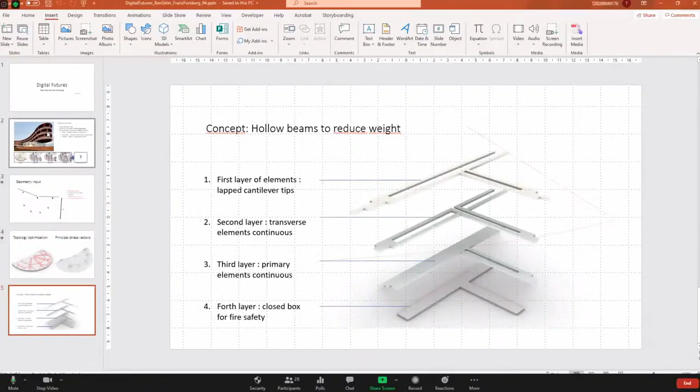Maybe one question I would like to ask, which maybe you mentioned, but I didn't really understand. The building, as you showed it, was always conceived as a steel concrete structure, or was it supposed to be in timber and then was changed? No. So the primary structure is concrete for this project. There's a huge pool, and concrete was a good solution for that area. In this lobe area, we used steel, unlike the normal concrete, because it was governed by self-weight, so we were able to reduce the governing load for this part of the structure.

So this was designed maybe 8 years ago or so. And I think only the first few big CLT buildings in Australia were around that time frame. This is in Melbourne. I see. So potentially it could have been considered in timber, but composite steel and RC slab is also a very efficient structure for something like this. So it was a reasonable design solution, but there's potential for timber to be a competitive solution for this particular instance. And that's what we want to pursue in this project.

Yeah, I'm really fond of that. I think that's really adding a lot to the more explorative projects, with this hopefully being a very technical and solution-oriented project, where by having the structure really be informed by those different flows as you showed it, we'll maybe not only see that this structure can be very efficient in timber, but that it can also offer a certain visual characteristic that is more able to communicate what is actually going on within this structural situation. So yeah, I think that's a really cool approach.

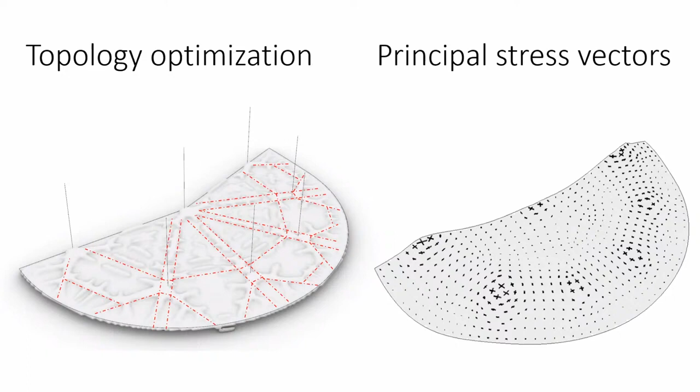But in my mind, as an architect, what we want is also some creativity that we can input into our design, so we won't be limited by the structural simulation software. So I would encourage all of you to reinterpret the pattern you get from the optimization yourself. In this way you can put your own thinking in the reinterpretation process, and this is also a process to design the pattern, not just get the pattern from the optimization.

I understand that this process won't be automatic; you need to draw your pattern yourself from the diagram you get from the structural simulation. But I think that's a better way to put your design thinking in this process. Yeah. And I wouldn't sell yourself short. Many architects have excellent structural intuition.

Okay, so that's what we had for our group. So maybe we can go to the next group unless there are other questions. Yep.

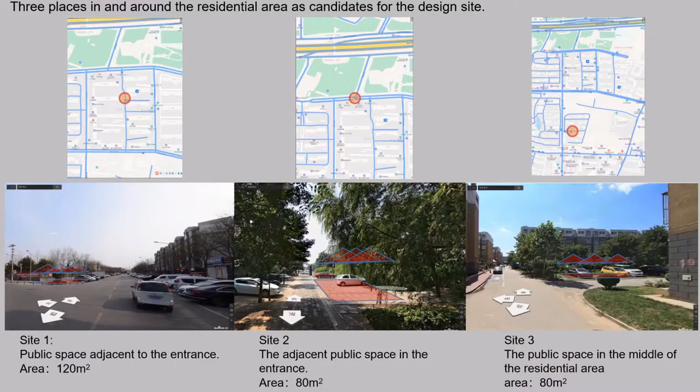Then we selected 3 places as candidates for the design site. They are in and around the residential area. Site area is one of our parameters. Finally, we assumed parameters based on the site of public space.

Let's take a look. Based on observations, if 60 people pass every hour, and the screening process takes 10 minutes, 10 people are tested every 10 minutes. Then if there are 5 groups of medical staff and equipment, 5 people in the waiting area in 10 minutes. In addition, we assume that no more than 5 patients will be in the treatment area.

If the number exceeds this, patients will be transferred to the nearest hospital. Another important point is that the distance between people should be kept at 1 meter throughout the process. In summary, according to the test process, we can draw 3 partitions of our pavilion: waiting area, testing area, and isolation area. According to the area of the site and the testing time, the number of people in each zone is limited, and the area of the zone can be calculated.

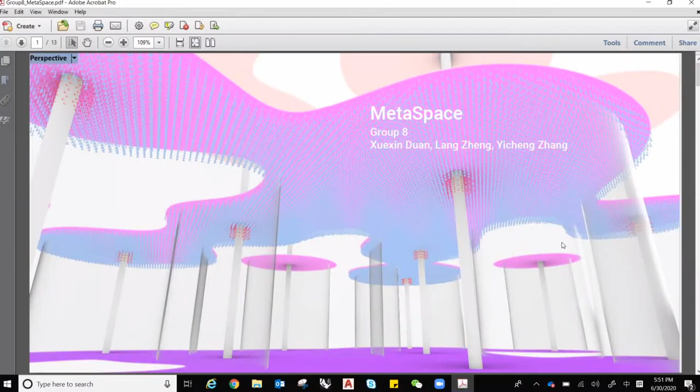So our hypothesis or concept is trying to create a system. We call it metaspace. With a very simple grid and a simple setup, we can generate a flexible space. This system also allows the users to define the space themselves, like the size of the space, the organization of the space, etc. It could be a small pavilion, a villa, or a bigger scale, like a temporary exhibition place. It could also be considered as a metaspace app, so the users can adjust the parameters and even choose the patterns on the ceiling.

It will automatically calculate the amount of materials, the costs, as well as maybe the construction time. And after the user places an order, the robots will come to help build the construction. Regarding the prototype, this is just to show one possibility. This is a 2-floor pavilion. Why did we choose 2 floors? One is we want to show the scenario that this can be multiple layers, as well as to show that by placing a simple grid, we can also generate a dynamic, flexible, and interesting place.

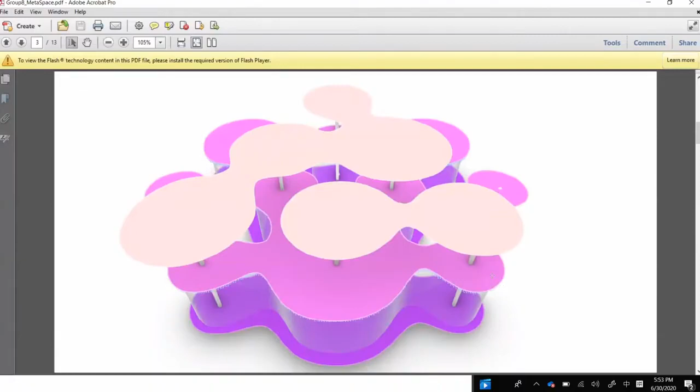Level 1 is more interior space with a courtyard. And level 2 is like an open space with a roof terrace. Also, we can insert the spiral staircase. For the F1 ceiling, maybe it's not very clear, we try to choose a more symmetrical shape. And for F2, we choose a free form, like an asymmetrical shape, to show we can have different conditions.

Okay. Yeah, you were muted for a second. Yeah. We heard you until different conditions.

At different conditions. And we also tested the structure simulations, this is with tOpos. It's quite heavy on computing. And then also with the ISO curves, we think both could work. Maybe the ISO curve is more integrated with the overall language, but I think both look okay. Yeah, so that's it. I think we also have some questions.

For example, for this ISO curve generation, is it also possible to optimize from the structural point of view? And we would also like to know how to calculate the quantity of the materials, and is there any way we can estimate the construction time by the robots, in an ideal situation?

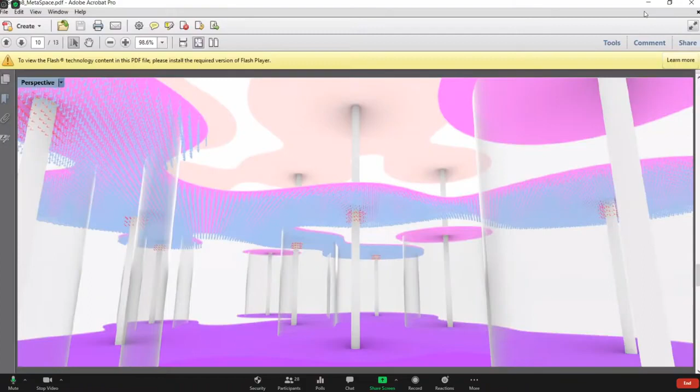Thank you. Okay, so we'll keep on. Mm. Yeah. Yeah, understand. Yeah, we can use the same algorithm to generate the pattern, the same language. Mm.

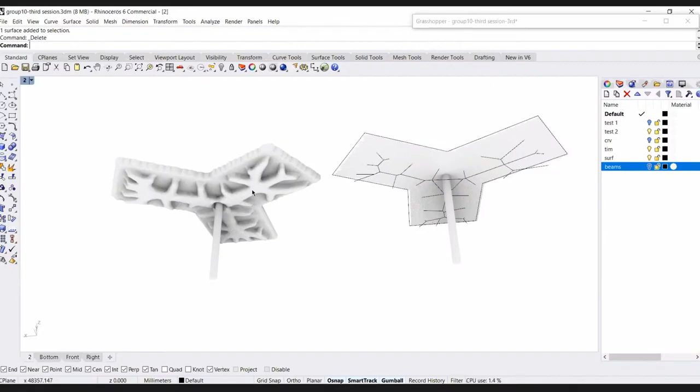Well, we just tried some topology optimization, and for the first step, we used a simple surface with one column. In this case, we just didn't want any collision to occur while assembling the beams on site, but because I wasn't sure if one column can bear the whole loads of the slab and the beams, I tried to add some more columns for the first surface, and I added 2 more columns in different positions, but this time I didn't go through the analysis with this.

I thought it would be more interesting if I use this surface as a module and develop it around a circle in order to have a more directional slab with more columns. I think it's more feasible in terms of structure, and also the shape of it is more dynamic, and also people can use the central space in their quality time maybe. Finally I obtained this shape.

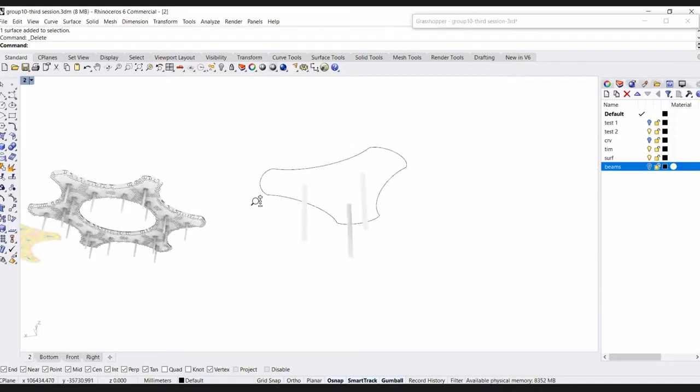And in order to develop my work, I just wanted to use the curves that I obtained from the topology optimization as some guides. Sorry, let me just show it from the pictures here. I used curves as some directions for the final timber beams. So I offset the curves and used these offsets for the final beams. But I have some problems here.

I have a question. As you might see here, there are some gaps between these beams, and I'm not sure if it's logical in terms of structural stability. When we want to assemble the final structure, is it logical to have some separate individual sections, or do we have to design a set of beams that are connected and joined together all around the surface?

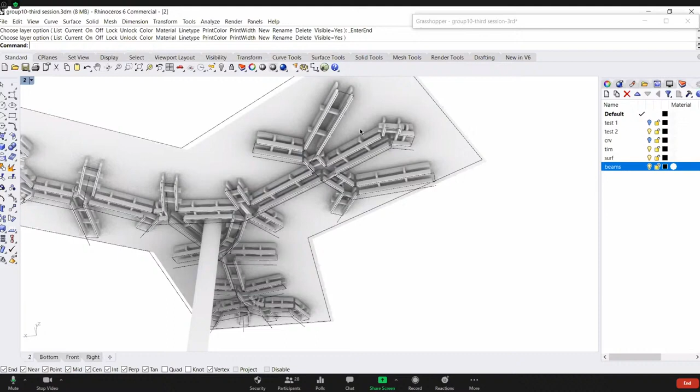Okay. So about the beams, I think that's exactly what we're gonna focus on in the tutorials following right now. For the different spatial configurations, I'm really fond of what we can see right now on the screen. I think that's a nice combination of simplicity while showcasing a couple of situations that are multi-directional. You have the radial situation, where around the ring you would just have a ring of beams.

But then really the question would be how do you integrate these cantilevers into the overall system? So if you're okay with it, just go forward with this. And after today, you're also gonna have a bit more information about how we can explore the beam tectonics.

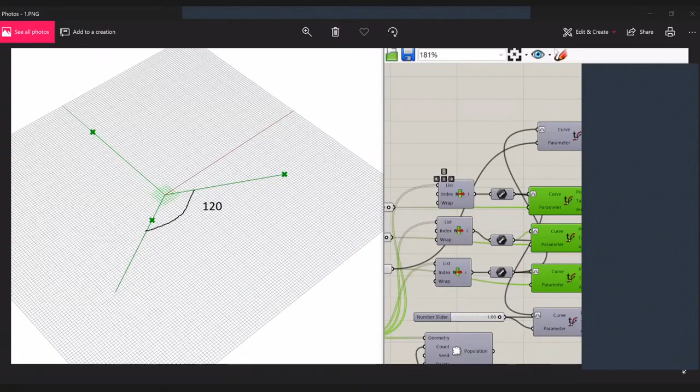Yeah, I see it. Okay, I can start the line with 120 degrees between them because they are at the most stable position to each other. And I try to choose random points on these lines. And after that, I tried to make my model with metaball components, but still I wanted to have more control on my form. So I tried another way.

I made a circle, considering those random points as a plane for this circle, and again chose random points on my circle. And so by interpolating these points, we could have our free forms. And I could make various forms with direct control on them by changing my number sliders.

And I try to consider it at 2 levels to make it attractive, but at the same time I try to have a minimum overlapping of them to optimize usage of material. So I try to make these shapes.

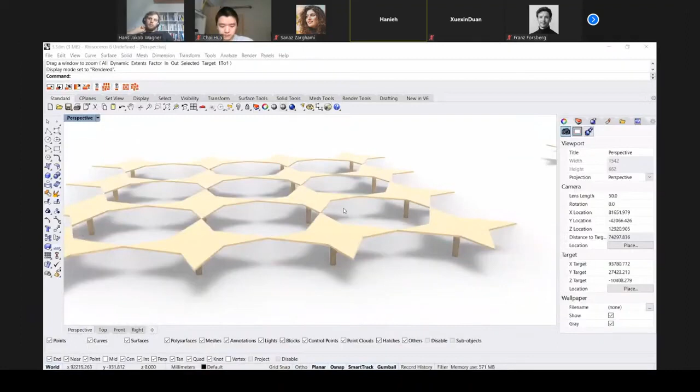Yeah. Okay. As you see in this model, we can produce a lot of patterns here with different kinds of shapes, and these places are empty places, and here we have another kind of places, and we can repeat this kind of pattern to have some great shelters, maybe some shading device.

And this is just an idea which we had, which we worked on last night with our friends, and I just prefer to show you and to know your ideas about them. Thank you.

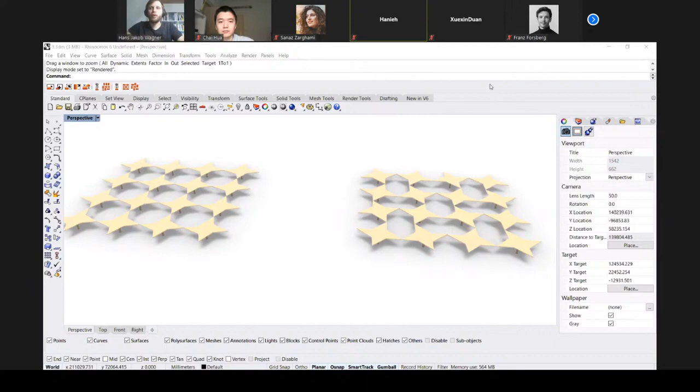Okay. Very interesting studies. Always quite exciting to see the approaches from all over the world to different patterning and these kinds of explorations.

I think what will be most important for you guys as a group is to start working together and to develop, I guess, one main concept forward, right? As you just formed the group half a day ago, I think it's totally fine for now, but maybe starting from tomorrow you should consider having one presentation that shows your project as a group, right?

Okay, with that, if Hua doesn't have any other comments, then we could go on with the tutorial for the beam tectonics. So yeah, let's move on to the next part. Okay. Yep. Thanks, Sanaz, Hanieh, and Xuexin.

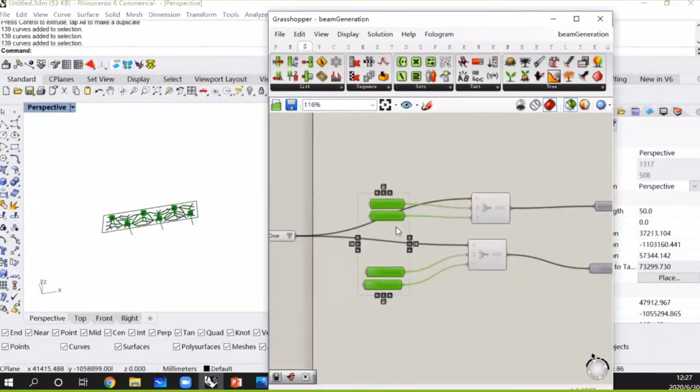So if you go to the Google Drive folder, you can find a shared folder for day 4. It's day 4, right? And there's a GH file there called beam generation, and you can download it and open it. We can take a look at the files together. It's just a GH file without the lines in the Rhino model, they are all internalized here, and I just pick them so that you can see all the lines here.

So while you are downloading or trying to open the files, I will give a brief introduction of the program, so you can see what we're gonna do today. What we want to do is to try to use the network we generated yesterday and transform it to a beam tectonic system that could be used for the real construction. And there are several steps from the initial input lines to the final structure. I think we can separate the process into 3 parts.

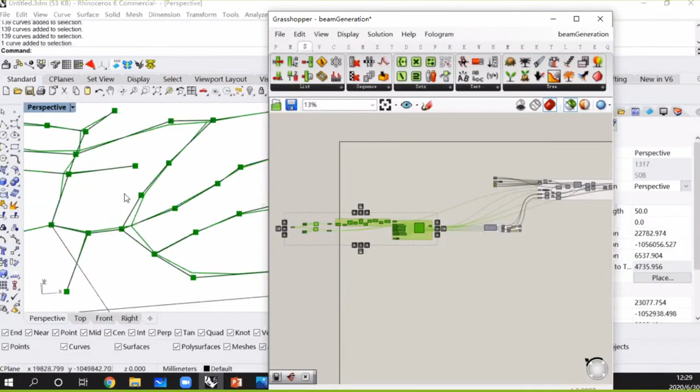The first part is to optimize the input curves, so we can use the optimized curve to generate our beam tectonics. And the second part is just to use the curve we get from the first part and generate the beam layout based on the curves. But in this case, you can see that what we get is 2 layers of

you can see the white line and the black line. There are 2 layers of beam layout, and they overlap with each other, and that's what we get from the second part.

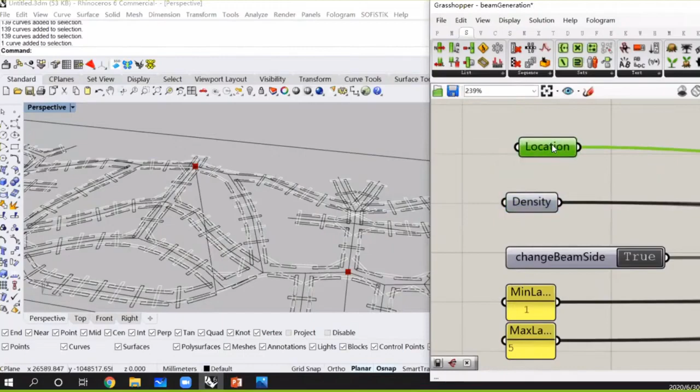And for the third part, we take the results from the topology optimization yesterday. We get the location of all the points in the optimization and the density values, and try to optimize the height of the beams and generate the beams. You can preview, yeah. So you can see the height of the beam is changing at the different locations, according to the structural result. If you're ready, let's get started from the first part.

So to generate the beams, we have the input curves, but the input curves may not fit the element size that we want to use. If you still remember the platform we are using, we use a standard element, grip it through the glue station, put it in position and nail them. So we want all the curves to be well fit by the standard element. But at the same time, we don't want any collisions between the elements, and we want two layers of elements with a certain area of overlap, so we can put nails in the overlapped area and glue on the interface to connect them properly.

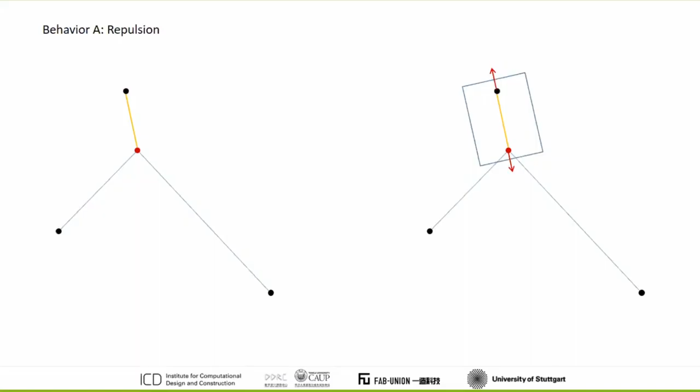So what we are using to optimize the input curves into curves we can use to generate the beams is the program in the first part. I think we call it an agent-based modeling system, and that means in this program we view every intersection point in the input curve as an agent, and we try to move the point locations so that the distance between the agents, or the length of the segments, is kept at a certain value.

So to optimize that, we may have several different scenarios to consider. First, we may have some segment that is too small to fit an element. So in this case, when we try to fit a block like this, and when we want to put another block, can I draw here?

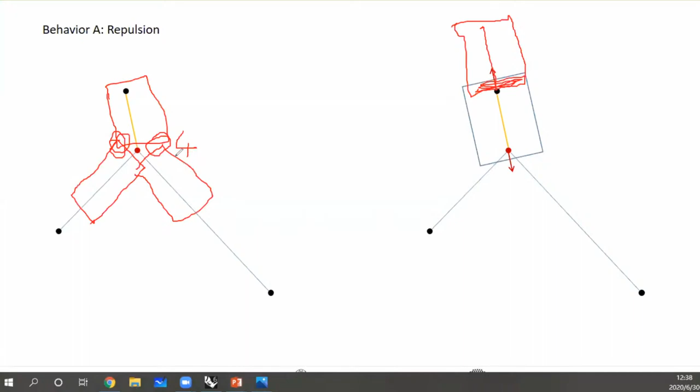So the method we are using is agent-based modeling. For all the agents, we can give them several behaviors to interact with each other. So they could organize themselves with these behaviors to solve some problems that we want.

So the first behavior we want to give to the agents is to deal with the first, very short segment. It's a repulsion. That means when we have very short ones, we define a tolerance: when the distance is smaller than a certain number, we give a vector to each agent, or each point at the end of this curve. So they will try to push each other away. In this way we will have longer curves. So this is for the first situation.

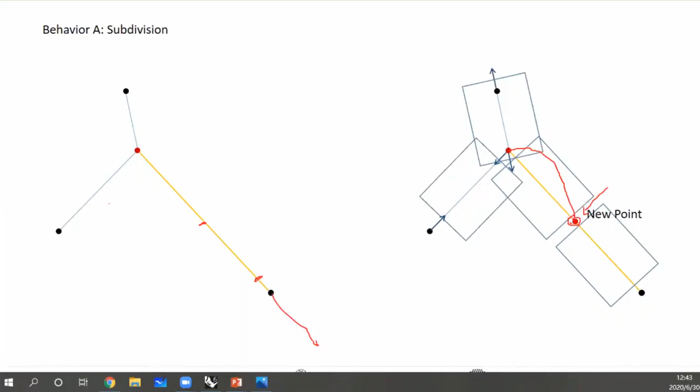Okay. So we have already talked about the 3 situations in the length of the segment, or the distance between the points. The next one is to avoid all the collision points that occurred at the intersections. If you see the blue rectangles, that's where we want to put the elements first, but we will have the yellow points at the collision points.

So in this case, what we can do is push all the points that are connected to this intersection point away from each other. So we will get the blocks also moving away from this intersection point. Maybe if we run several times or optimize very well, we will get the rectangles on the right. So you can see there will be no collision.

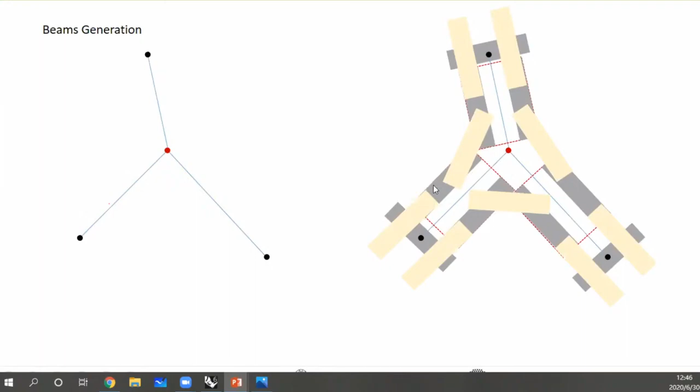The gray blocks here all represent a timber block, a timber element. So we have 2 rows of timber elements, and we will have one in this direction, so they can connect the 2 rows together. But what they connect is the elements on the upper or lower layers. So you can see when we put elements on the upper layers, this block in this direction will try to connect these 2 rows together, and we will have an intersection part here, and we can put our glue and nail them together. So this is pretty much the way we optimize the input curves.

So let's see how it works in the program. In the input part, you will have two options. The first one is all the beams here. The second one is only the three segments here. Maybe you can take a look at the simple one, so we can get a better understanding of how it works. So let's change this one here to 2. So we will make the input the 3 curves here.

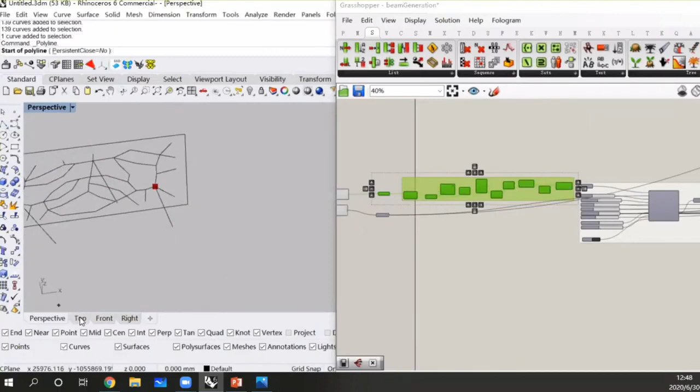So for the program, let's look at all the inputs so we can understand what we need to do the optimization. First, the input lines, which are the lines that we get from the network generation. So we just take this as input, and this is the process that tries to intersect all the segments. That means if you have some grid drawn like this, this part will try to intersect all the curves and get small segments for you. So the input is 3 curves, the output will be small segments like this.

So what the program needs for the input is always small segments that have no overlap with each other, and they will all be split at the intersection points. This part you can read yourself. Okay?

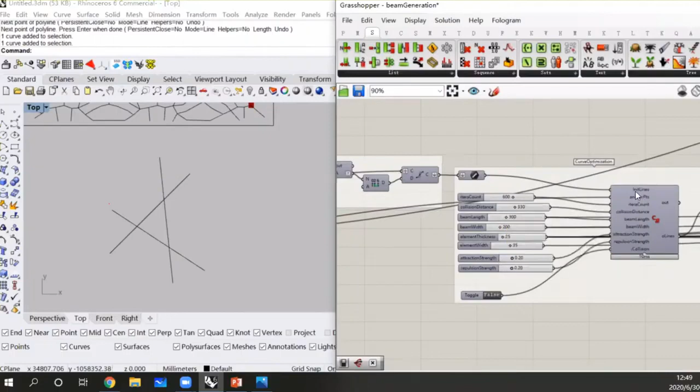And the second input is the anchor point. What the anchor point means is, if you still remember from the last tutorials, we have the points of columns that we kept fixed when we did the dynamic relaxation. So also in this part, when we make the optimization of the beams, we want to make sure that the agent or the point at the top of the column would not move anywhere. We will just set them as anchor points. So this is also from the input.

And the iteration count is how many iterations we want to run this optimization. I don't have to explain that, right? So there are 3 parameters which are directly related to the size of the element we want to use. But there's something I want to make clear, so you won't misunderstand.

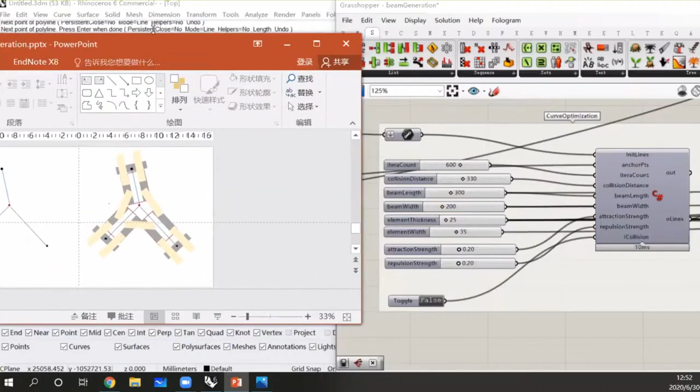So when you see a beam here, the line will represent a beam, and also a block like this will represent a beam. That's what a beam means in this program. So the rectangular block you see here is what we call a beam. So what we input as beam length and beam width: this is the length, the longer direction, and this direction we call the width.

But when you see element thickness or element width, we mean the gray element here. That is a real timber element we use to fabricate the structure. So when we say beam, we mean the abstract rectangle that bounds the elements here. But when we say elements, it's the real elements we use to fabricate. The element thickness and element width are used for the second and third parts. I just put the parameters here, but don't let this confuse you: what we need for the first part is only the length and width of the beam. Okay.

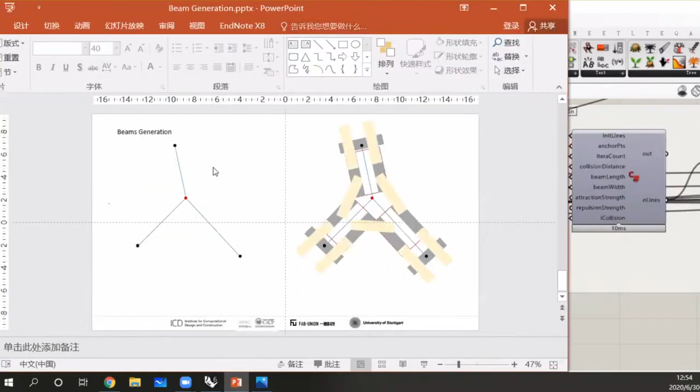Okay. And for the next part, we will have two strengths to input. One is attraction, another is repulsion. These two parameters refer to these two behaviors, how large the repulsion we want, and how large the attraction force we want. But you don't see any strength for the subdivision, because when it reaches the threshold, it will just subdivide. So we don't need parameter inputs for this behavior.

And we also don't have one for the collision, because I set the strength for collision as 1. So the default strength for collision is always 1. That's our most important destination, as we want to avoid all the collisions. That's the most important behavior. So all the strengths of attraction and repulsion are always smaller than 1. We just need to input these two, and you can view them as the proportion of the strength of collision avoidance. Yeah, that was the attraction strength and repulsion strength here.

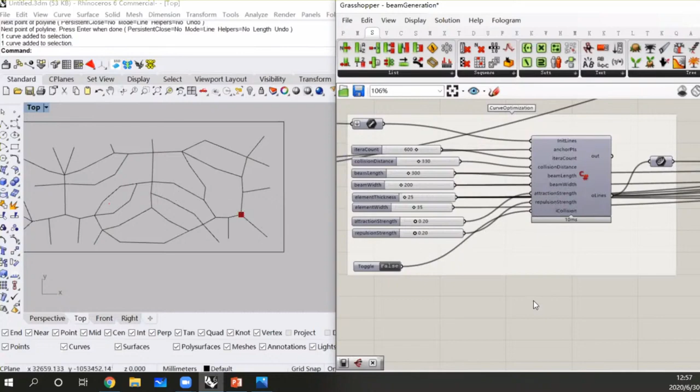When we don't try to avoid the collisions, it could get a pattern that looks quite good, but it's not feasible for fabrication. If we turn this to true to avoid all the collisions, we will have some problem somewhere, and we need to pay a lot of attention to the input curves to avoid all the problems in the collision. You will see later.

So let's see. In this case, we import the 3 segments here, set them as fixed points, run them through this program, and see what we get. Actually, you can see some of the curves have already deviated from the original curve, and the length of the curve has already changed. Maybe if we bake it and check. Yes, we have 2 segments at the longer ones, because this one has already been divided into 2 segments, so we can fit them.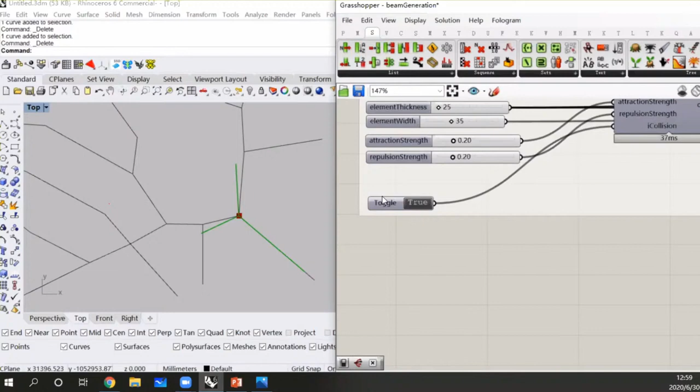And so I hope you can get an understanding of how this program works. Yeah, in this case, maybe there's no collision at all in the first place, so it doesn't matter whether we try to avoid the collision. Let me see how we proceed. Maybe we talk about this part and then we go back to the whole structure.

The second part takes the output from the first program and tries to generate the 2 layers of this kind of beam layout based on the curves we get. Let's get a quick look. It takes the line output from the previous program as input, and it shares the same parameters with the first program. It also uses the beam length and beam width to generate the beams, and it also has element width. I have already explained the width of the gray block and this yellow block.

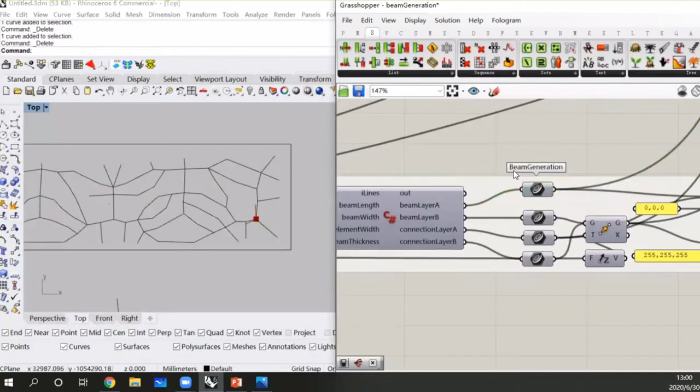And the beam thickness makes a distance between the 2 layers that we generate. The output is this, the first layer of beam layout. You can see we have one here, and we actually have 2 here. If the distance between these 2 elements is enough to fit an element in this direction, it will just generate 1 element here.

And the next layer will just connect the first layer with this same element, and you can see there are no collisions at the intersections, and these beams will connect all the elements in different layers well, and we have proper intersection areas where we could put the glue and the nails.

So this looks fun, and yes, we get just the two patterns on the plan. So this is still not the final beams that we use. So let's see.

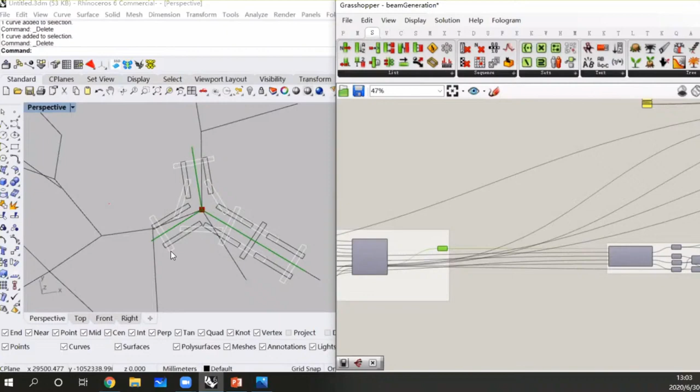So in this part, it still uses agent-based modeling, but the most important thing for this part is to draw the elements. So there's not much to explain in this program. If you already have the curves from the previous optimization process, you can just draw a block, right? And you can draw the block here, and then this is just some geometric drawings. I won't pay much attention to this part.

So actually, if you have the curves there, you can program your own program here to generate different beam layouts. So maybe you can try different layouts that we provide here, or you can invent your own layouts. They're all free in this part. But if you don't want to do that, if you want to use the one that we provide, it's all up to you.

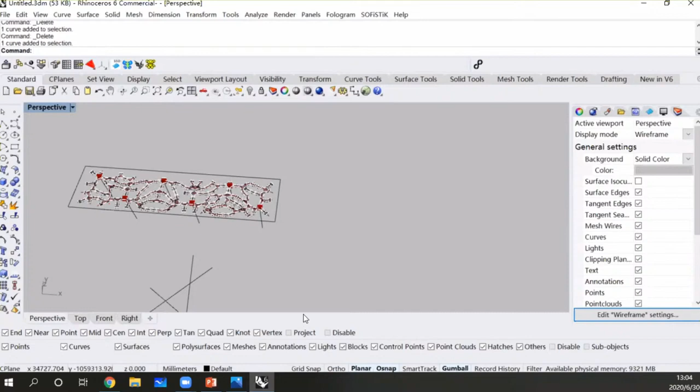And then let's try to see what we can get from the very complex pattern that we got from the optimization yesterday. Let's change this to 1. So we get this pattern as the input, and have like 5 columns as fixed anchor points, optimize the curves. And you can see it will work in a much slower way. So let's take a look at the result.

Now maybe let's keep this true at first place. Now you can see, let's select some area, maybe we keep it here. You can see if we want to generate beams here, this segment is not long enough, so it will be pushed away, and this is also not long enough, so it also will be pushed away. So after all the movements of all the iterations we optimized, the location of the beams may change. It may deviate from the one that we defined at first, but I think they won't move too much.

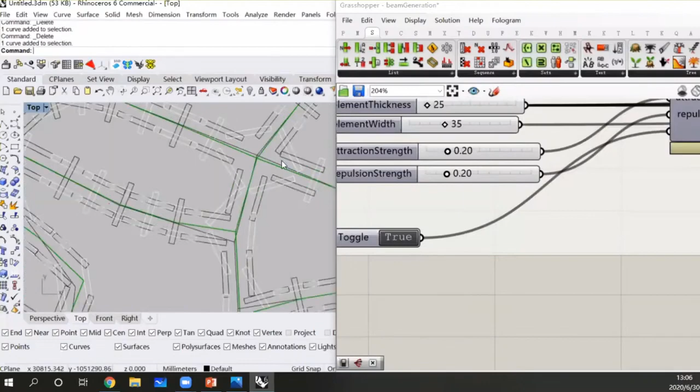And you can see we probably avoid some of the collisions at the joints, but there's still some problems that need to be optimized. But you know, in the computational optimization process, sometimes it just doesn't work out for all the situations. But for most parts, I think it's quite desirable.

Actually this pattern as input has already been optimized manually by me, so you can see there won't be too much problem in these patterns. But if you draw it yourself, with too many small segments or very long segments, the program may generate several situations that we are not satisfied with. We don't want that. Let's just take this as input and see what we can get, and then you may see where the problem is.

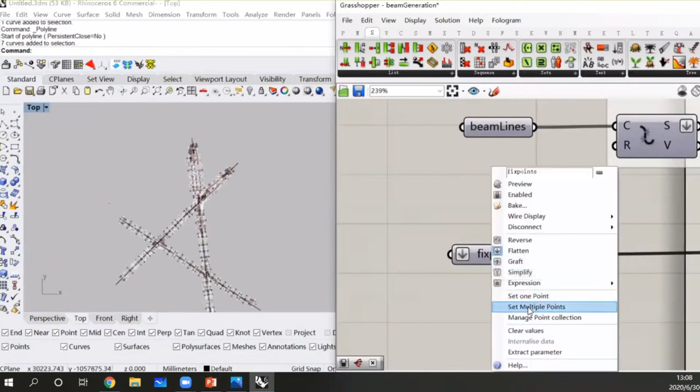And we take these three curves as input. We'll compute, and we take this intersection point as the anchor point. So I think we have some problem here. Oh sorry, I think I culled some curves manually here and I forgot to. One, two, three. Okay.

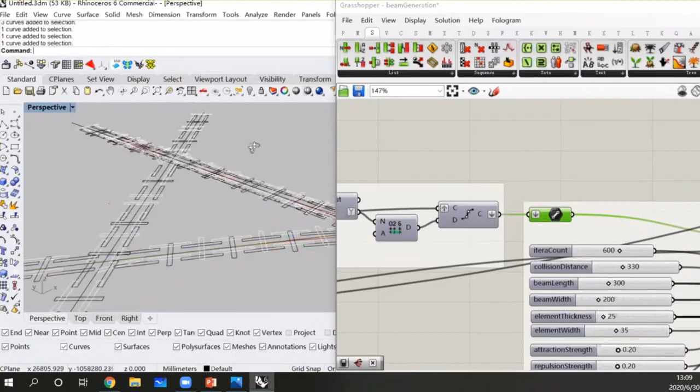So you can see this is totally not what we want. And actually in the optimization, some very weird thing happens. Maybe we try some different patterns. Yeah, this one works pretty cool. And I think it also works on this one. And I don't know what happened in the previous example.

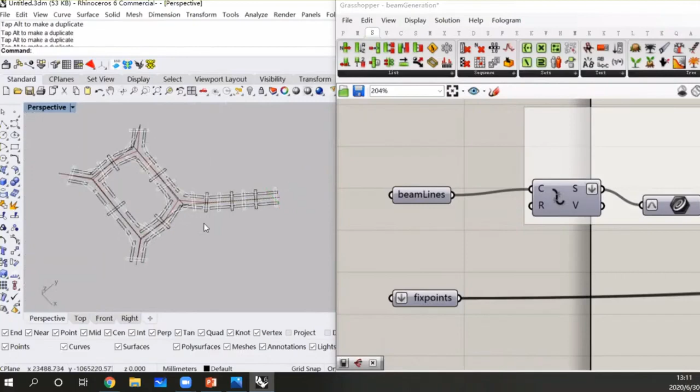But if you have maybe more segments, it works quite good in this case. I'm sure you will have your own problems when you are using this program, but hope it works for you. If it doesn't work in some certain situations, I would recommend you turn this toggle to false, so it won't do the check for the collisions, but it will generate similar patterns that look like this.

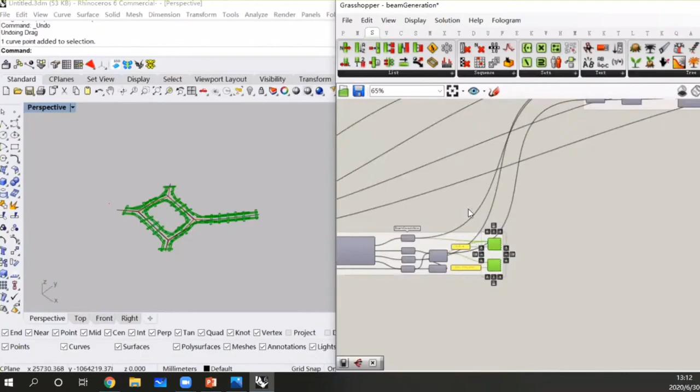And so now we have the patterns and we have the layout of the beams. What we want to do is to generate the beams of the final structure. So to do that, we need to set some anchor points. I see where the problem is.

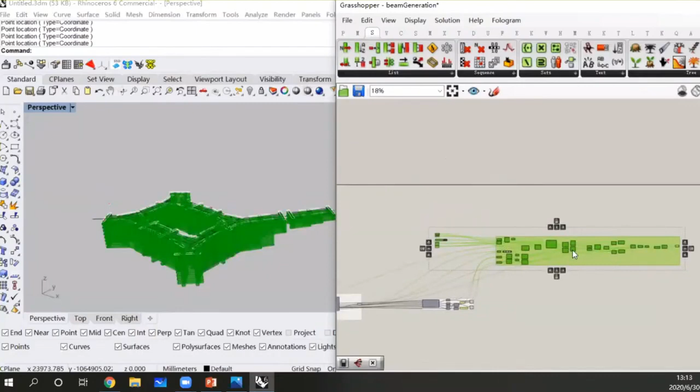So in the third part, as I already said, we take the outputs from the topology optimization. We take the location and the density of the points as the input for the optimization, so that we can optimize the height of the beams according to the structural simulation result. In this case, as this was plotted manually by hand just now, we don't have this to import. So you can see the height of the beams doesn't change too much. So we go back to our example files at the first place.

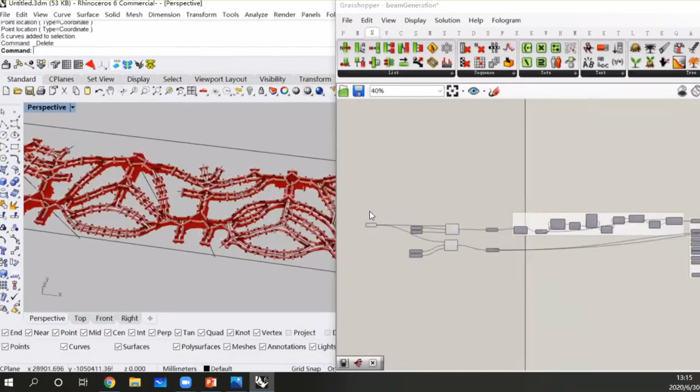It needs some time, and make sure to select the first case. Now we get the pattern here and also the final beams here. And you can see the beam layout and the height.

Yeah, let's keep going. So take the pattern here and the structure property here. What we do is first we get the data for the structural properties, and then we try to change the data into the height of the beams. So what we do is try to remap the data into different numbers of height.

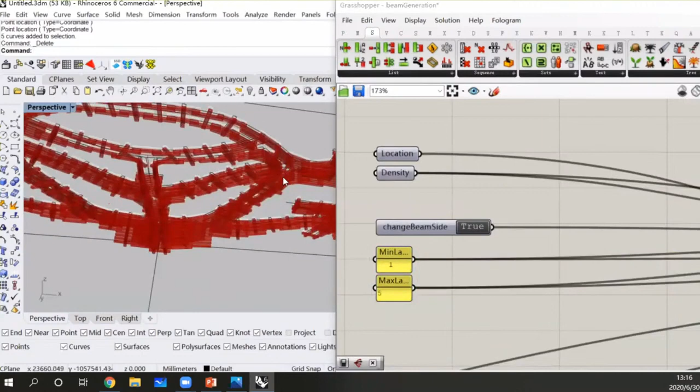So if we have a curve here, and the density of the structure here is very large, in this case maybe we need to remap the height of the beam here to a larger value of the layer of the beams. So here we have two numbers. One is the lower threshold of the height of the beam, so we set it to 1, but you can change the maximum of layers as you want. And here we set it to 5.

And so the density of the structural property will be remapped to some integer from 1 to 5, just 1, 2, 3, 4, 5. That's the only 5 choices we have for the height of the beams. So when we say 1 layer, we mean these two different layers. We call it 1 layer in the optimization process. Okay, so these 2 layers form one layer in this process, but there are 2 different layers in the beam generation part.

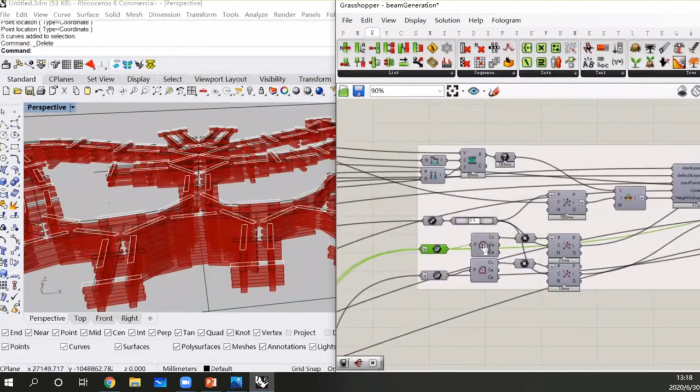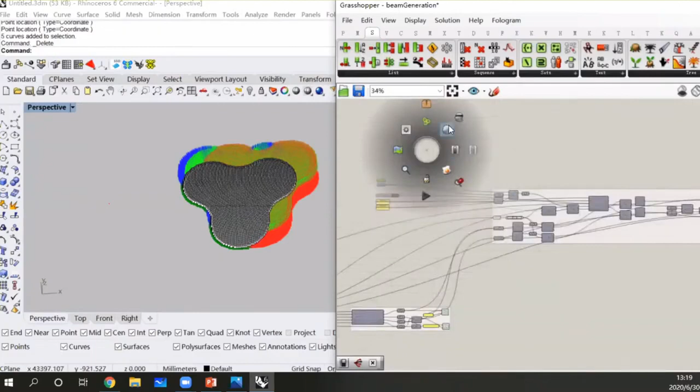Aha, I put the wrong one again. I will update the files later, but let's keep going with the tutorial. I just check the results. It seems fine, so I'll just see.

Yes, and what we want to do is try to find the closest point in the structural simulation, and from that we get the density property of the location. So we remap that density to the integers, and we select the same index of the density and the location. So we will transform the density value to the height of the beams, and try to set it to the beams here.

So for the elements, each element will try to find the closest point in this set. So you will know which curve this element is closest to, so that it will also get the same value from the curve for the height of the beam. So if we set the height of this curve as 2, the closest elements here will also get the value 2 for the height. And then we will just move them into different layers and extrude them. That's what we do here in this part.

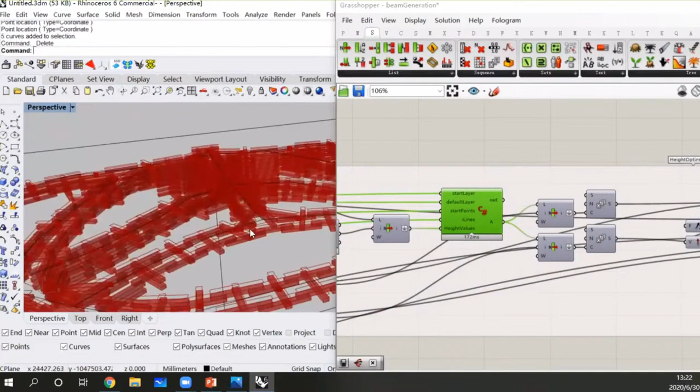I think you can read it yourself. But we have another C# program in between. And that's why now you can see there are several different layers of the beam, even though we have the wrong input of the structure property. What we do in this one is try to keep the change of the height of all the elements very slow.

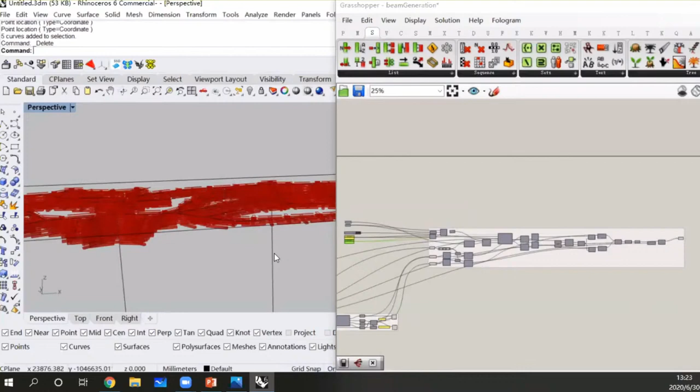And in this program, I set the height at the anchor points to maximum. So if you have a column, you will have 5 layers at the column, and then it will try to decrease the height according to the structural property, keeping it continuous, so there won't be any change that is very steep.

And I think I will update this part so you can get a better understanding of what we do here. Maybe I can answer your questions now, and then after that I will update the files and you can have a look at this yourself. Is that okay? Yes.

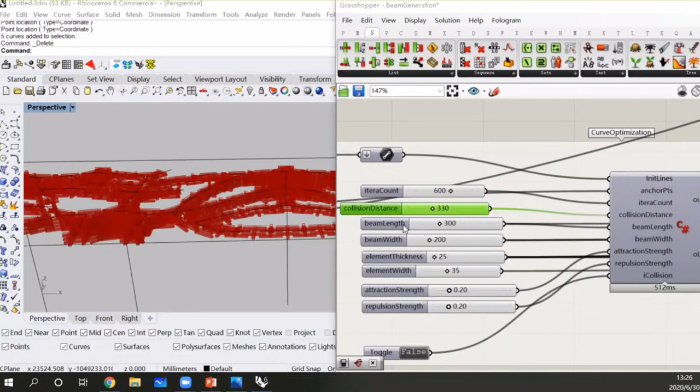I think the collision distance, the distance between the points, needs to be based on the element, the size of elements you want to use, and you set this collision distance. Make sure that the different layers have a certain contact area. What about beam length? Beam length equals element length. Yes, beam length is the same as the element length.

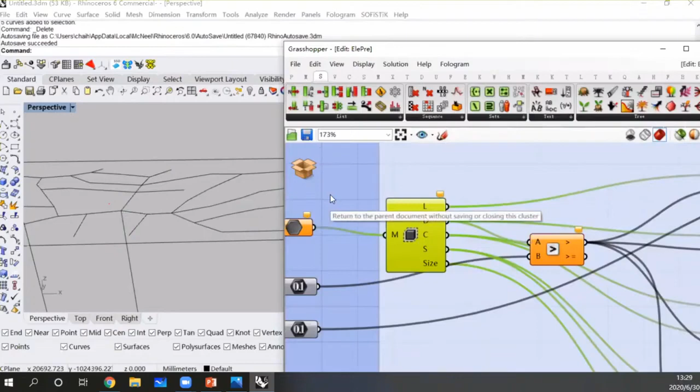Sorry, I don't understand the location component. It can be an internalized mesh from previous content. Okay, the location, actually, maybe I can open files from yesterday. If you have this, you will have an output as location, and then the second is density. And what we do is take these two as input for our height optimization. Okay. Yeah. It's actually two parameters here: location and density.

How can we change the pattern of the connections? So what do you mean by the pattern of the connection? Yeah. Are you here? I see the question you sent to me. Yeah, it's from Sadra, from the live chat. I don't quite understand what's the pattern of the connection. Maybe the patterns that we showed in the previous slide. Yeah, what you mentioned in the presentation. Here? No, before, I guess. Yeah, this one.

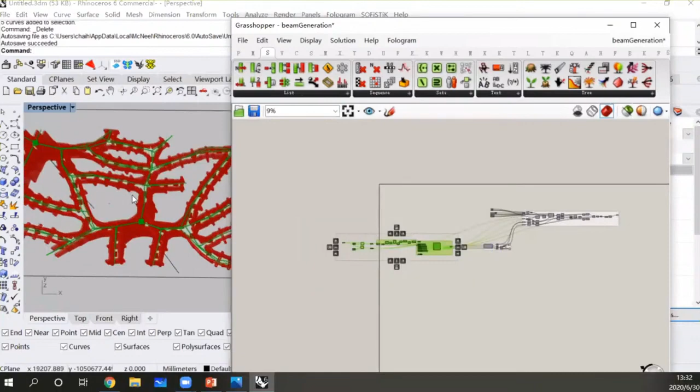Yes. Yeah, I think for the tools we provide, this part only deals with the curves. So if you draw another pattern, you can use this, and this part tries to draw the geometry of the beams. So you can just change this part yourself if you want to define your own. Yeah.

And next: is the collision testing algorithm based on mathematical line intersection or just distance calculation? Actually, it will draw a rectangle in the program. It draws an actual geometric rectangle and tests if there is any intersection between the rectangles. If they collide with each other, then they will be moved away by this part. So it will test if it collides and then move. If there is no collision, this function just won't be activated.

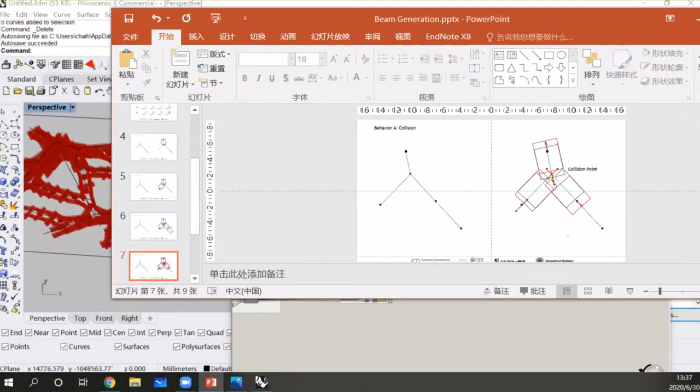Was it Misbah and Mahmoud? Shall we just go back again and present the? I think you already have screenshots in our folder. You want us to send the Grasshopper and Rhino file? Is that easier? Or just screen sharing? Just screen sharing, I guess.

Okay. But was it your group where we said that we would want to double check the topology optimization and see what's wrong? Or see how to make it work? It was not easy actually to play around with the software on my side. Yeah, I think it was really helpful to just have a reflection on that, how it works.

I didn't fully understand. I just remember there was one group where the columns. I think that was Mahmoud and Jennifer probably. Yeah, okay. Jennifer and Alireza, no? Sorry, Alireza and Jennifer. You guys want to check with Hua what might have caused your simulation somehow to ignore the column positions?

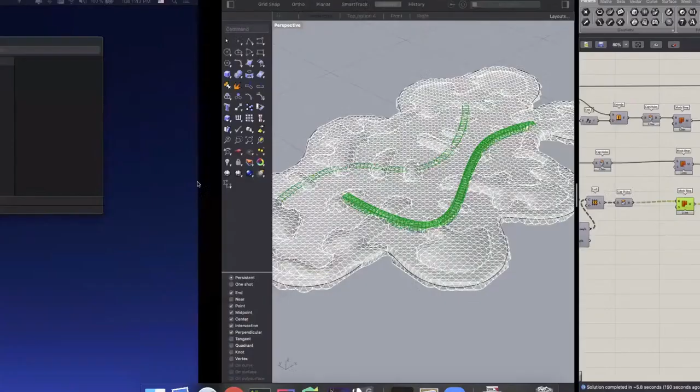Which part do you want to see? Can you explain where the problem is? Okay. Yeah, I'm sure. Okay, yeah, so this is, I mean, very kind of coarse lines. I'm not getting the kind of branching that it's supposed to have. I'm not sure what was wrong exactly.

It's the mesh that you just showed. It's the final mesh you get from the optimization. I'll show you the one. Yeah, this one. Is the one you use to generate the lines. Exactly. But to my view, I think you need to subdivide the structure with more resolution. And maybe run more iterations, you will get a better mesh.

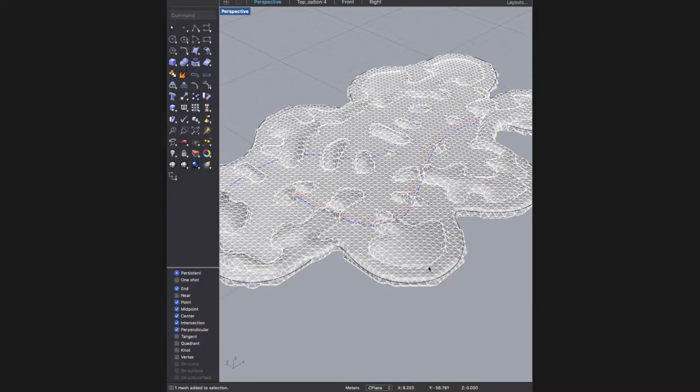So basically, just change the resolution or the size. Okay. The mesh doesn't look like a very desirable result, and I think the cause is maybe the resolution. Yeah, I used only in this case 30 iterations and resolution of 90. I was trying to go as minimum as possible. You can try to increase the resolution. It will be slower, but it may help.

Okay. One more question: if the load or the Young's modulus was... I can't hear you clearly. If the load would affect also the mesh itself or the result, because I was playing around with the load. Sorry, I can't get you. Okay. I just changed the load. Yeah, you can also try to change the load, but I think the resolution will have more effect. Oh, okay, I'll do this. Thanks. I'll just try to play around with the settings.

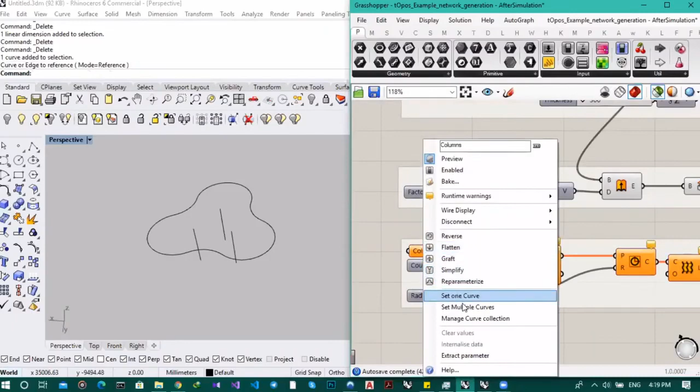Okay, Alireza. You're muted. We can't hear you. But we see your screen. Oh, can you hear me right now?

Yes. I just deleted the values and re-entered the components here, and the result is different from the first result. I am really confused, and I don't know the reason. Shai recommended that it could be because of the units. I changed the unit to millimeters and to meters again, but I really don't know. It may be because of my system or because of not having enough GPU or CUDA.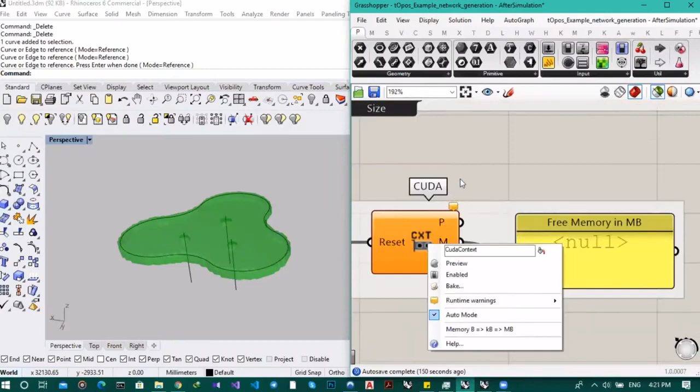I really don't know. But I would be really thankful if you could change this to GPU mode and see, because I cannot change it to GPU mode on my machine. Yes, I cannot.

It is not enabled for me because my graphics card is GTX 610X, and it is not compatible with Topos. Okay. But as you said, and as I read in the texts, it would not have this effect on the results, and yes, I think so. We should get the acceptable result. But I really don't know why we have this weird optimization process.

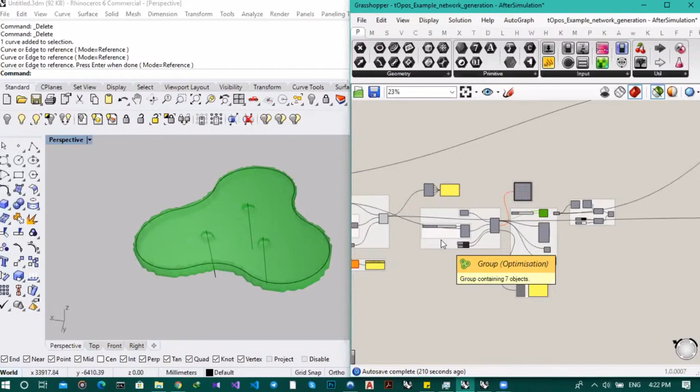But you didn't run the simulation yet, right? What? I didn't understand. But you haven't run the simulation yet. Okay, I want just... It will take some time. Yes, exactly, I'm afraid of that. Maybe don't click. You can change the resolution to a smaller one. Okay. For example, we can turn it into 30, 20. Yes, 30.

And the number of iterations, okay, it is on 40. And try it. If it could be faster, we'd get it soon. I guess it would be. It doesn't work. No. Yeah, just last night I tried to enable it and I was successful, but here... Okay. I guess it is because of my system, with these circumstances and symptoms we have.

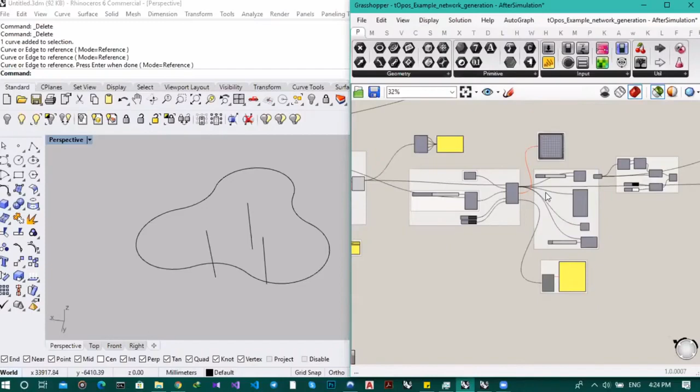Do you get any error before the optimization in the modeling? What? Yeah, no. Sorry. Yeah, maybe I will check your files later. Yeah, actually, that thing happened to me also, and it's just like rebooting things. You basically need to close all the things and reopen them, and just try to set it multiple times. Hopefully, you'll be able to do that. I really don't know where the problem is. I checked all the parameters, but you know it is internalized from the previous file.

But in my files, for example, in this file, we hope. Oh, oh, it works. I think I should restart my laptop right now. Yeah, but quite slow. Should we wait?

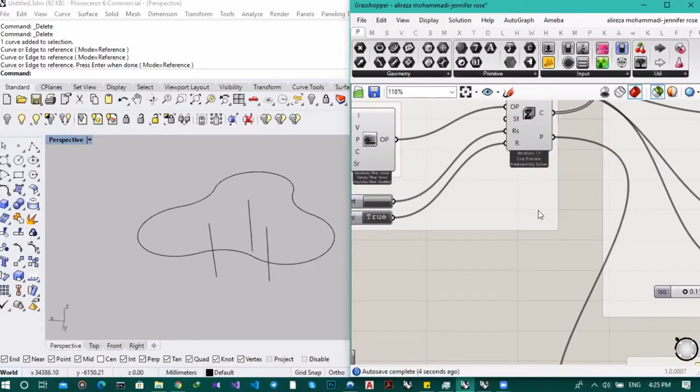I will try to update the files in the Google Drive folder. I have uploaded the updated file, and I don't know if my teammate, dear Jennifer Rose, has enough specifications on his system to get a run. Okay, it's at 15. If some other participants have questions, we can switch and get back to my file later. I am ashamed that the other participants are waiting. Good. And I have already updated the GH file for today's tutorials. You can get it in the same folder.

Just the iteration levels are getting completed. I don't know. Get the results. Oh, my laptop is bursting. And 35. What was the iteration number? It is 48. Whoops. Please, do a little lift. Oh, it is 80. Okay.

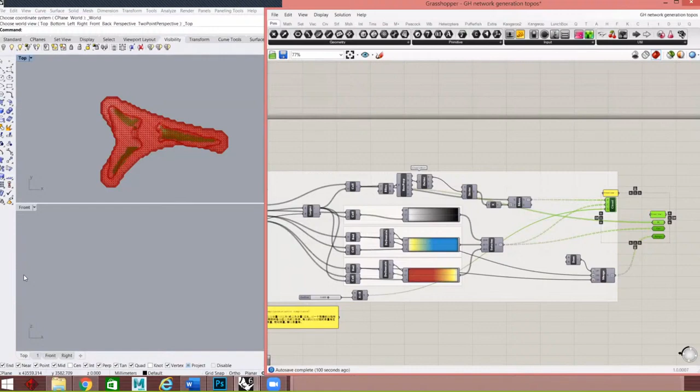If other participants and friends have questions, they can ask until it is completed. I have a problem with the visualization part of the Grasshopper definition since yesterday. Can you help me with that? Maybe I'll share my screen. Yes. I ran the simulation and everything, but when I display it, nothing shows up. So I ran the optimization, and I increased the resolution as well. But then just this bit here doesn't work properly. I don't know what the problem is. So you get nothing here in the preview? No, nothing in the preview. I only get the points selected, but nothing in the blurry cloud. Yes.

Can you turn this to the mode where you internalize these points? And see if there are some numbers inside. Should I just put a panel and check if there are numbers? Yes, can you check what you get? I think it's fine, there are numbers. And I think it's also fine. Good. But why is this? I think everything is okay. Can you turn off all the previews of the other components? Okay.

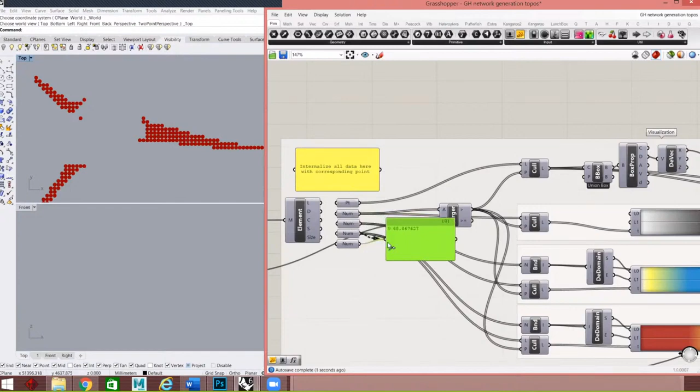When I turn on everything in the visualization, the whole group, then I get a weird generation. It's like the one you had in the definition you just fixed, everything overlaps. I kind of get the same thing. And could you turn... I don't see any. Maybe I need to check your files on my computer. Okay. Because even yesterday when you were running the tutorial, I had the same problem. Only this part wouldn't work.

This part? Yes. Would you just go a little bit to the left? Not to the other side, to the other left. Right? Yeah, I'm not sure. The other, yeah, this way again, more, this more. Mm-hmm. I think those icons here. Try to turn them off on the left, just below the graph.

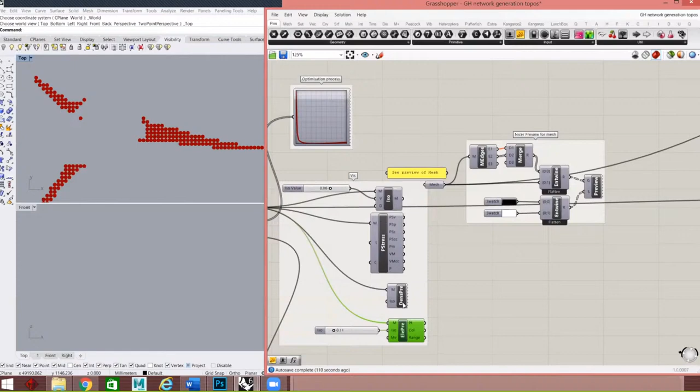I'm sorry, I can't hear you properly. Just below the graph, there's a group, white group. Yeah, there's the preview of the mesh. Just below them, there's the Iso, PStress icons. I can draw this, right? This one. Yeah, those group. I mean, just try to turn them on and see if they show up on something.

Yes, this one did the same thing as the preview we did. Can you go back? Okay. Just preview them, make them also preview. And this one as well? No, those, I just turn them on, turn preview on for those icons. This one. This. Okay. Yeah. And this one did the same thing as the one there. Okay. I'll just use this one then. Yeah. Thank you so much.

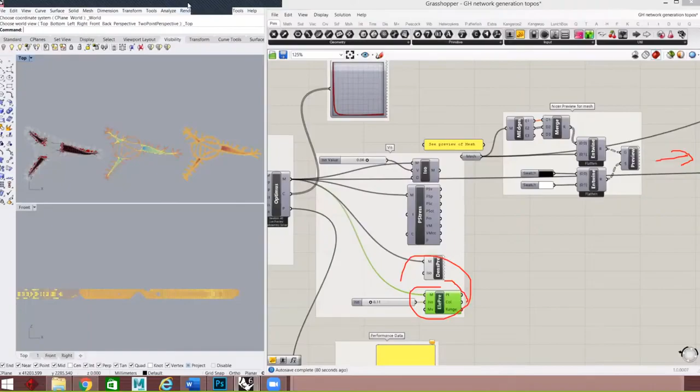Thank you. Chris. I do have a few smaller issues where you might have an answer on. Can I share them with you? Yes. You can see my screen?

Yeah. I was wondering, during simulation I sometimes see the compliance graph first dropping and then starting to rise again. And I was really wondering what I should think about that and what it means. Do you have any background on that or experience with it? Or is it also out of your field of expertise?

Actually, I can't answer this one, and this also confused me a little bit, and maybe we can leave this question to Simon in our expert lecture later. Yeah, maybe he knows. I can send you this by email. Yeah, that would be great. I can send you the one by email, so that maybe you can forward it, then he knows.

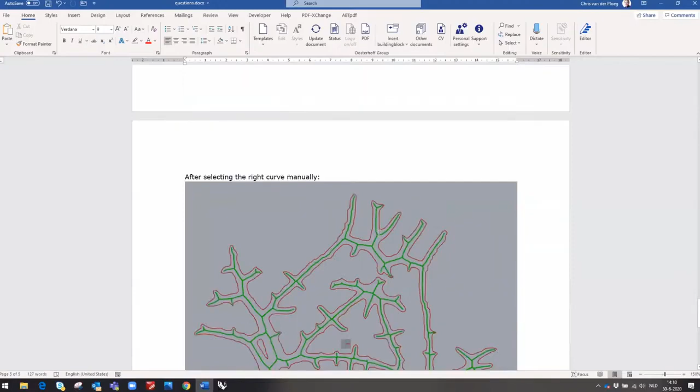Good. That's that one. And the last one is when I try to generate those lines, it gives a mess, and I wouldn't expect this to happen. And I think that has to do with some areas being enclosed in other areas. Yes. I'm able to solve this one manually, so for the workshop it works. But it might be a suggestion for future improvement.

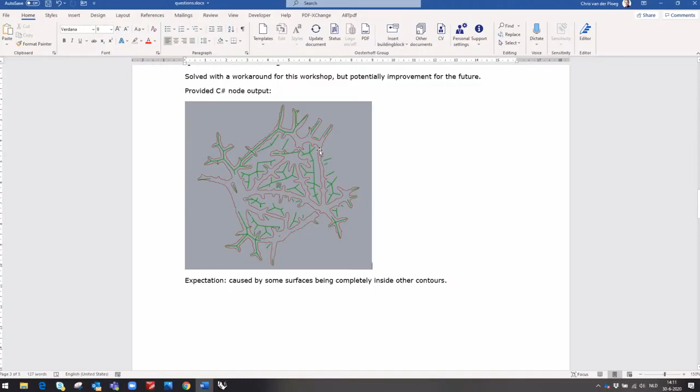Oh, okay, thank you. I think that's why we set a slider there for the intersection plane of the mesh. Where the intersection happens will decide the outline of the curves. And sometimes the mesh output from Topos is not that good. Sometimes if you try to bake the mesh into your Rhino model, it will give a warning that this is not a correct mesh. And definitely the case. Yes. I think that's also why this stuff happens. Sometimes you really need to fix it manually.

Good. Then I have no further questions, and I will share the first one with you by email. Great. Okay, great. Thanks.

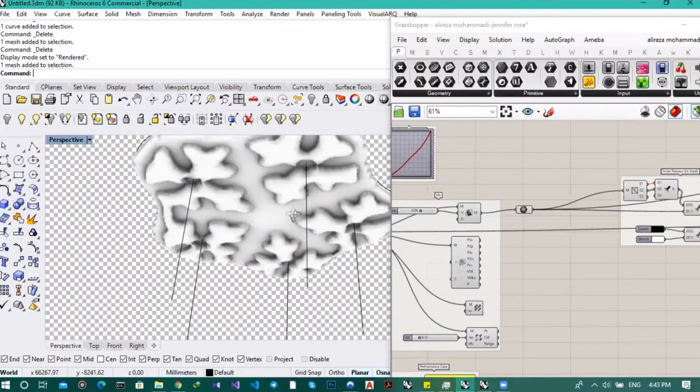I have this bake invalid object. Wait, this error, as you said. Okay. We have this form of weird boundary, but I think it is because the area of my boundary is not so wide and so big. Just 5 elements, 5 vertical elements. So the meshes would be like this. But I just get a little hope to continue the analysis in other sessions.

Great. Thank you very much for just hearing me and solving the problem. Okay. Oh, we already run over time.

Yeah, so just a quick reminder, please upload your files from today in the day 3 folder. I think we're missing group 6 and 9. And with that,